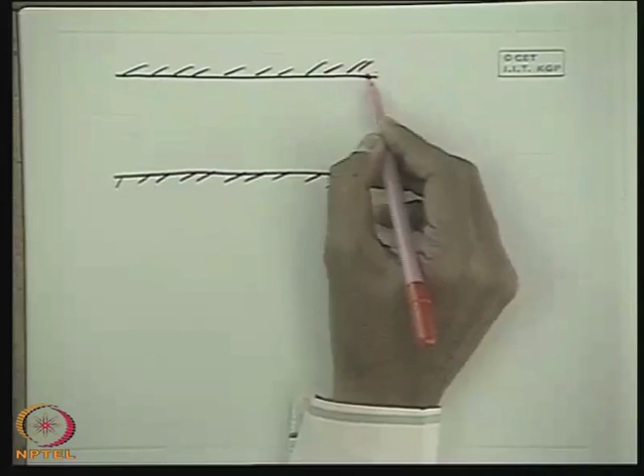So let us now see how we can do it. First we recall the friction factor concept, starting with flow through a pipe. This section is dedicated to viscous flow through a pipe, specifically turbulent flow. This is the pipe, and this is the axis of the pipe. We take a control volume.

Now let us consider a control volume whose surfaces are coinciding with the pipe surfaces. Let us take the control volume like this. Now we see what are the forces acting on it.

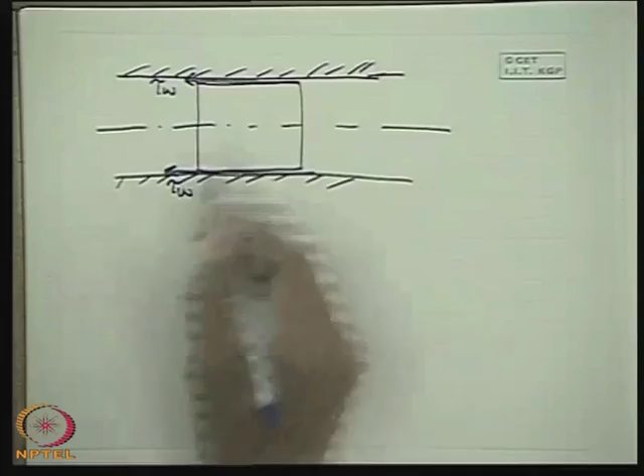One is the shear force, tau W, acting on the surface, in the same direction because this surface is coinciding with the cylinder surface of the control volume. Flow is taking place in this direction, so the shear stress tau W acts throughout the surface in this direction. Pressure is acting at this cross section, let it be P.

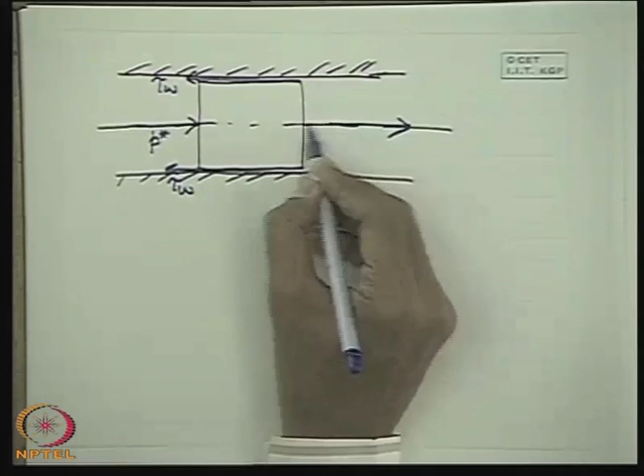Let this be the piezometric pressure. We consider the pressure as static pressure plus the equivalent pressure head due to the elevation head, that is the potential from a reference datum. Why do we take it? Because in case of a vertical pipe, or a pipe inclined in a vertical plane, the difference in pressure between one section and another is the static pressure difference plus the change in potential head, which takes care of the gravity forces. This type of analysis we have already made.

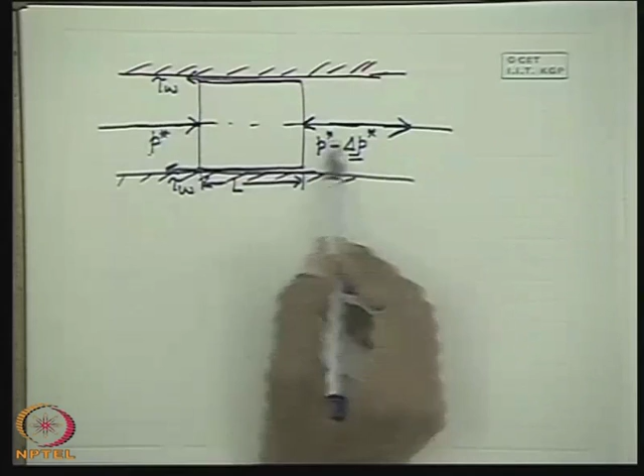So there is a loss in piezometric pressure, delta P star. Let this be the length of the control volume, or the fluid element as you may call it. So this is the loss over the length L in the piezometric pressure. This difference will be the difference in piezometric pressures, which is the difference in static pressure if the pipe is horizontal.

Now if we make a force balance considering the inertia force to be zero, as in a parallel flow through a tube or pipe, the inertia force is zero, as we discussed earlier. So if we make the force balance of this fluid element, meaning it is in equilibrium with the pressure and shear forces, we can write this.

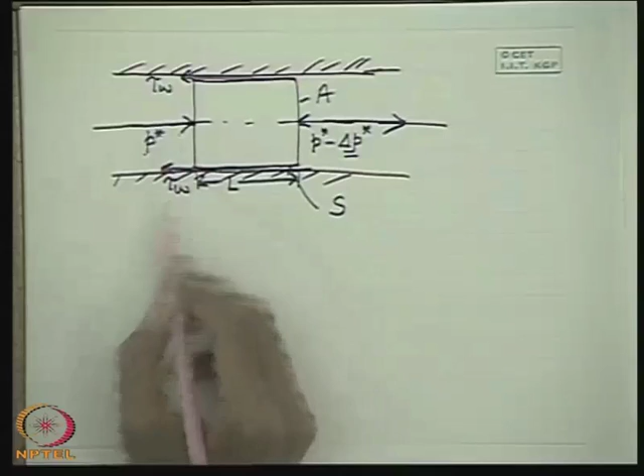If we consider the cross sectional area as A, and the wetted perimeter as S - this is valid not just for a pipe but for any duct - then we can write P star into A on this side, minus P star minus delta P star, into A. This is the net force in this direction due to pressure, which must be balanced by the opposite direction force, that is tau W into the surface area, meaning the wetted perimeter times L, where L is the length, giving the surface area.

So simply we get from here, tau W equals delta P star A by S into L. So this is the shear stress, where S into L is the surface area, wetted perimeter into length, the total surface area over which the shear stress acts. So this is all right.

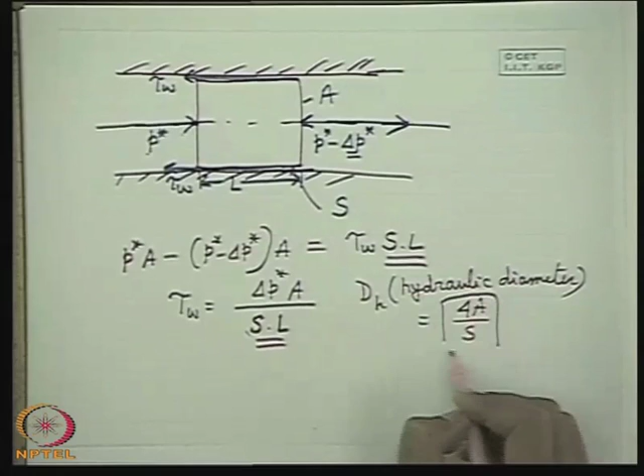Now if we define a hydraulic diameter DH - how do we define it? We define hydraulic diameter as 4 times the cross sectional area divided by wetted perimeter. This is the general definition of hydraulic diameter for flow through a duct, internal flow: 4A by S. So we can write A by S as 1 by 4 DH. So this becomes DH by L into delta P star.

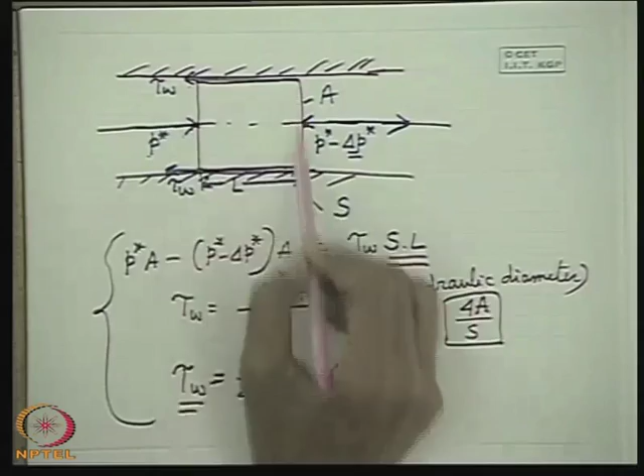So we get an expression relating shear stress to piezometric pressure drop, which accounts for the change in potential head in terms of equivalent pressure. In case of a horizontal duct, it is simply the static pressure drop. So you see shear stress is related to pressure drop, found through a straightforward application of force balance on a fluid element when inertia force is zero. Physically, it is because of shear stress that there is a pressure drop. For an ideal fluid with no shear stress, there is no pressure drop from one section to another - pressure remains the same at all sections, and the energy also remains the same.

There is no dissipation of energy. So therefore the shear stress is related to pressure drop by this expression.

Now if we go one step forward, recalling an earlier class, we discussed that the coefficient of skin friction, or skin friction coefficient CF, is defined as the shear stress at the wall divided by the dynamic head, half rho V square. We define that for any type of fluid flow, whether internal flow through a duct or external flow past bodies, the skin friction coefficient, a dimensionless parameter, is defined as the shear stress at the wall, that is at the interface adjacent to solid and fluid.

So tau W divided by half rho V square, where V is the reference velocity, which in case of internal flow or flow through ducts is the average flow velocity. If I write this definition and put this value of tau W, it becomes 1 by 4 into dH by L into delta P star by half rho V square.

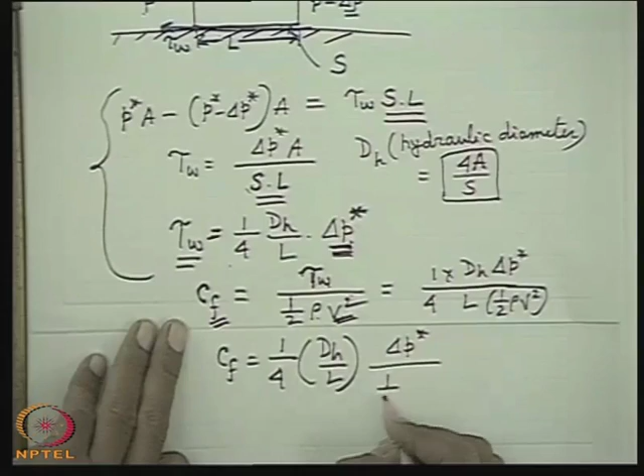This CF is known as, again I write, CF is equal to 1/4 dH by L, all dimensionless parameter, dH by L and delta P star divided by dynamic head, half rho V square. So this way I write, this CF is known as

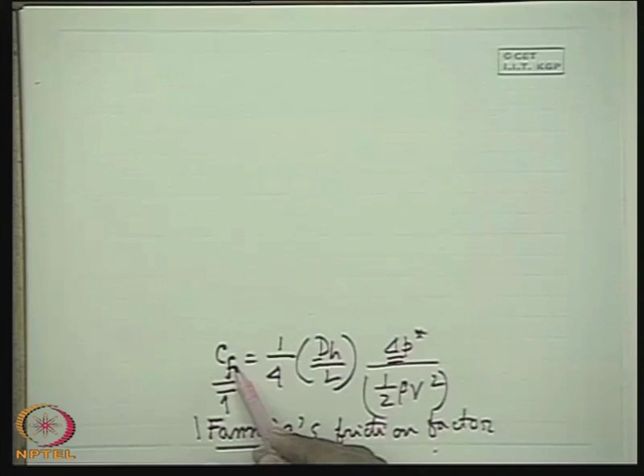Fanning friction factor. Fanning is the person, Fanning's friction factor. This CF, derived from the basic definition of skin friction coefficient in terms of piezometric pressure drop or static pressure drop, as you say, in case of internal flow, and the hydraulic diameter, is known as Fanning friction factor. That means it is derived from the basic equation of skin friction coefficient in terms of the shear stress at the wall, but then it is expressed in terms of the pressure drop.

Since we know the relationship between shear stress and pressure drop derived from the force balance of a fluid element, the final expression stands as skin friction coefficient in terms of the pressure drop and the hydraulic diameter, and this is the average flow velocity in case of an internal flow through a duct, whose definition is Q by cross-sectional area.

So if cross-sectional area remains same in the direction of flow, the average velocity remains same, because Q always remains same under steady condition. So if the cross-sectional area changes, the average velocity changes. So this is the definition of Fanning's friction coefficient.

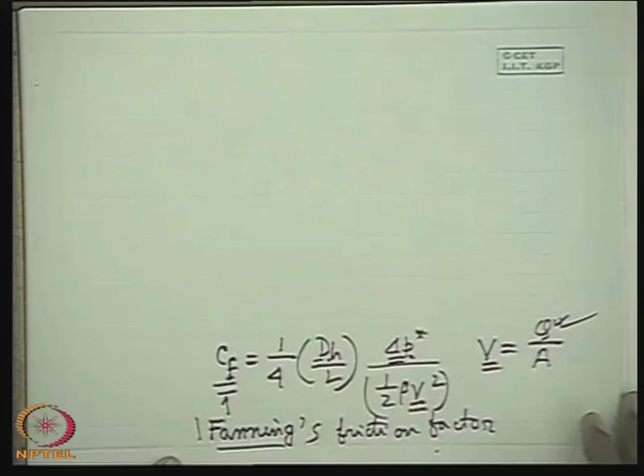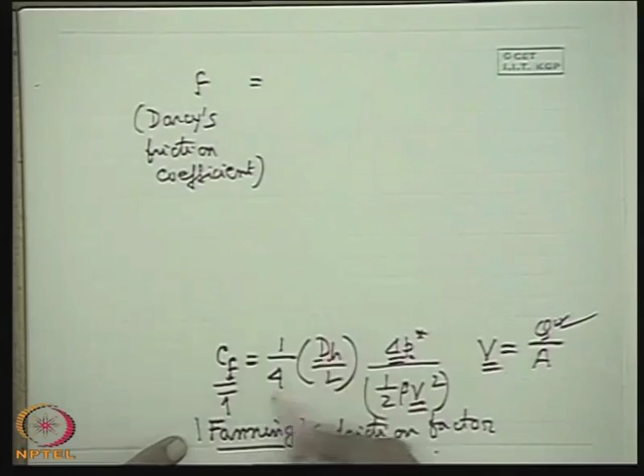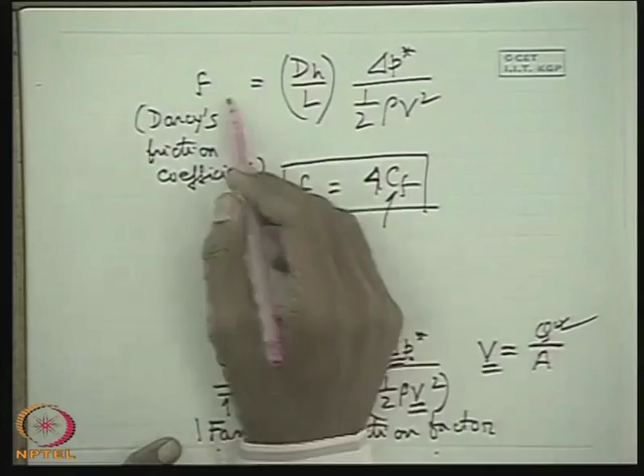So Darcy defines the friction coefficient F, that is Darcy's friction coefficient. This is Darcy's friction coefficient, another person who defined the friction coefficient F by doing away with 1 by 4 — he left out this 1 by 4 — simply defining it as dH by L times delta P star divided by half rho V square, which means F is nothing but 4 CF. That means if you multiply the Fanning friction coefficient by 4, you get the friction coefficient F. F is dH by L, delta P star, half rho V square. So this is the definition of Darcy's friction coefficient.

This equation defines Fanning's friction factor. This equation defines Darcy's friction coefficient or friction factor, whatever you call it. Now this equation is actually represented in a different form, not as F alone. If we write delta P star as F into L by dH into half rho V square, this equation becomes useful to practical engineers.

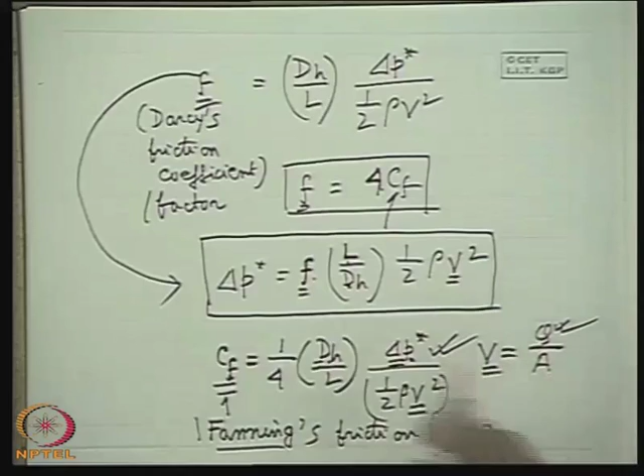What they do is, if they can know the friction factor for a particular flow from some handbook, some chart, or from predetermined experimental values, knowing the geometry of the duct, they can find out the pressure drop for a given length L. Geometry means the hydraulic diameter is known, and if the flow rate is known, one can find the average velocity knowing the cross-sectional area, and then find out the pressure drop in the duct.

And one can find out the corresponding power requirement. Power requirement is simply delta P into Q — this is the fluid flow rate, and this is the pressure drop over a given length. So to force that fluid at this rate over a given length, this much power is required. So for a given flow rate through a given geometry of pipe, that means for a given length and given diameter, one can find the pressure drop and the power required.

Or the other way, if we know the power or pressure drop, I can find out what should be the flow rate. So this equation is very important in the applications of pipe flow, or viscous flow through a pipe.

Now for a circular tube or pipe, dH is the pipe diameter d, because 4 times cross-sectional area is pi d square by 4, divided by the wetted perimeter. Since the pipe is flowing full, so pi d, so this d becomes d. So therefore this will simply be L by d.

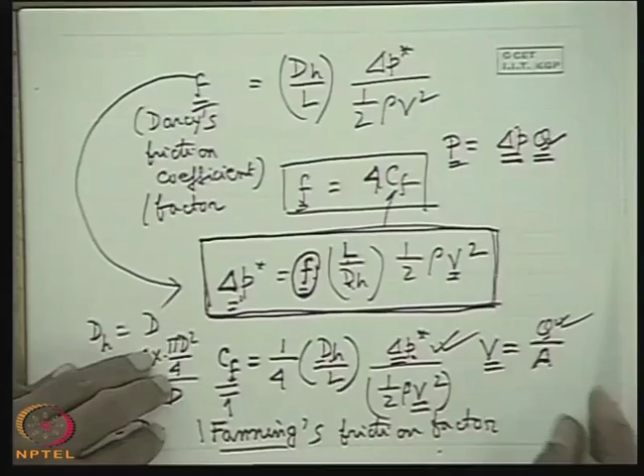So now the problem boils down to knowing the values of the friction factor. Now let us write the friction factors for pipes. I will discuss this, the Darcy's friction factor in pipes.

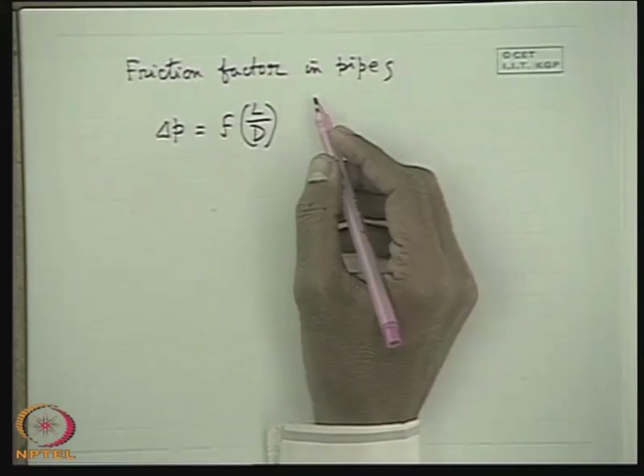Definition is like this: delta P is equal to this friction factor times L by D, length to diameter ratio, times half rho V square, dynamic pressure, where V is the average velocity, where V is equal to Q by area. So this has to always be in front of your eyes, this definition of friction factor.

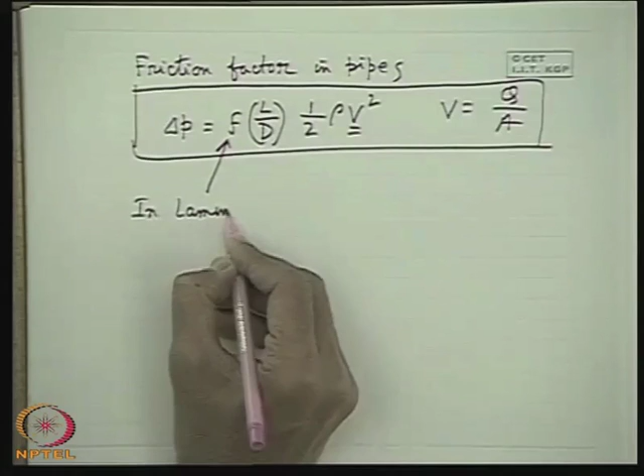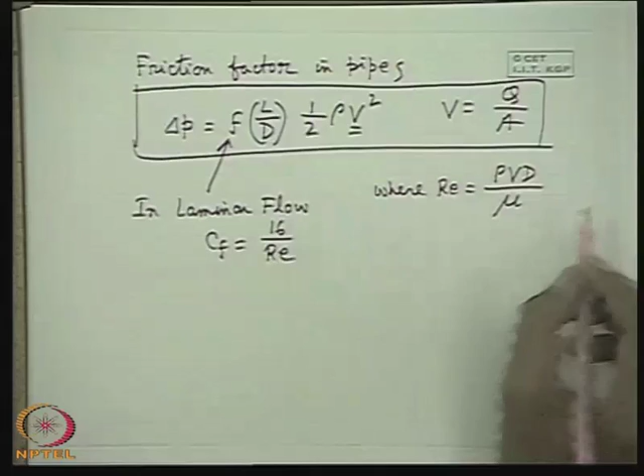Now this F, first of all in laminar flow, we have already deduced the value. From the exact solution we have found Cf is equal to 16 by Re, Reynolds number, which we have found from the Hagen-Poiseuille solution in class, rho Vd by mu, where V is the average flow velocity in the direction of flow, that is the axial direction of the pipe. This combination of parameters is dimensionless, this typical combination rho Vd by mu,

which is known as Reynolds number. We have seen that tau W by skin friction coefficient by half rho V square, which is nothing but Cf, the fanning friction factor here, equals 16 by Re. So F is equal to 64 by Re. So it is a simple analytical relation we know.

But in turbulent flow it is difficult to develop that relationship from theory, but nowadays we are doing it with the aid of computational fluid dynamics, and also experiments are being done to match it. Even the solutions of turbulent flow, as I have told earlier, depend upon experimental information. So they are generated basically from experiments.

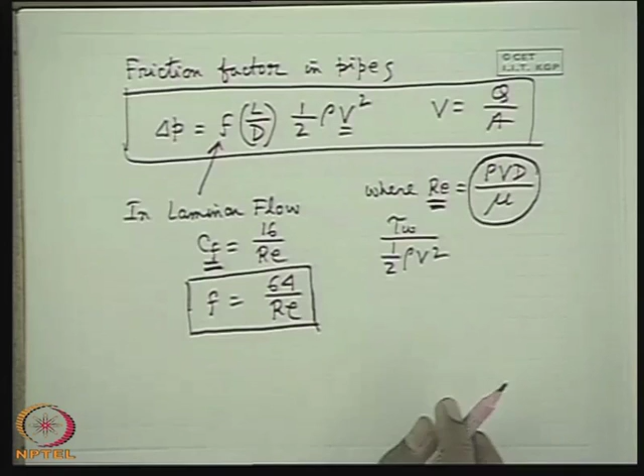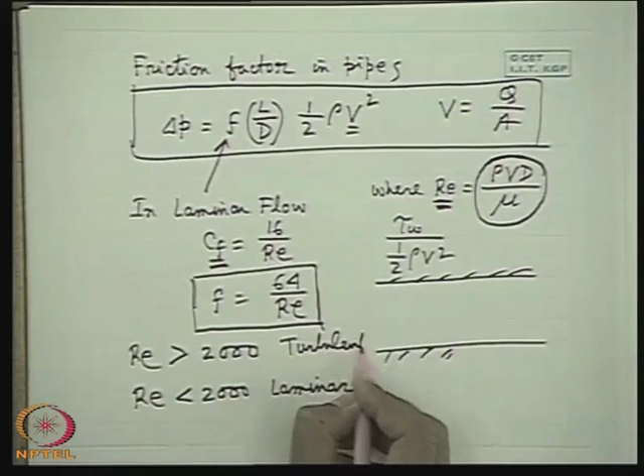Now first of all you have to know, in a pipe flow, the flow becomes turbulent when this Reynolds number as defined exceeds the value of 2000. That means Reynolds number less than 2000, the flow is laminar. So this Reynolds number criteria for flow to change from laminar to turbulent depends on flow type. So this is the 2000 Reynolds number below which the flow is laminar, and above which the flow becomes turbulent. This is only in case of pipe flow.

For different types of flow, the criteria for Reynolds number for flow changing from laminar to turbulent is different, meaning the values are different. But Reynolds number is the dimensionless number which serves as the criteria for laminar to turbulent flow.

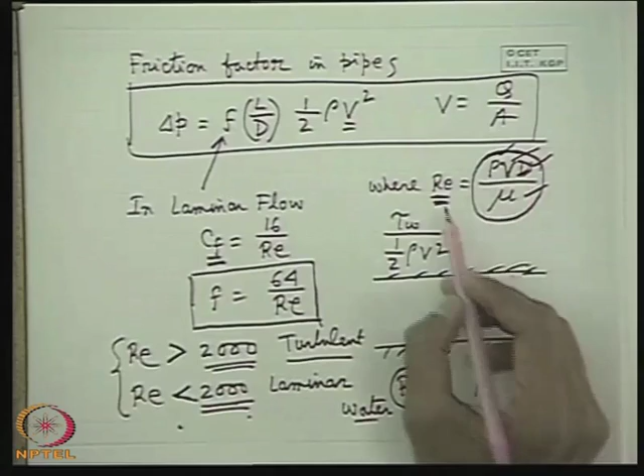So considering water, even at ambient condition, if you take its value of rho and mu, you can find out to maintain a value of 2000 or below, to keep the flow laminar, you require, even for a feasibly small diameter in laboratory or in practice, a certain value of V. That means an extremely small value of flow velocity or extremely small value of D can only make the Reynolds number less than 2000. For all practical applications, a moderately large value of D and moderately large value of V makes the Reynolds number exceed 2000, so the flow becomes turbulent.

And in turbulent flow, the geometry of the friction factor or the shear stress changes. The shear stress, that is the friction between layer to layer of the fluid, and between fluid and solid, is enhanced by the mixing in turbulent flow. I will discuss that afterwards.

So in turbulent flow, the flow resistance, which is due to friction between the fluid layers or between fluid and solid, is increased. That means the viscosity is apparently increased. That's why a term, apparent viscosity or eddy viscosity, comes in case of turbulent flow. So therefore the flow resistance is increased, and pressure drop is increased for a given flow in the turbulent region.

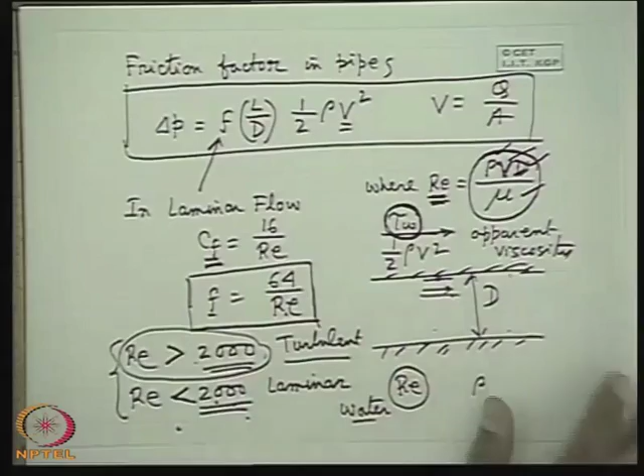There is not a single equation by which one can fit the pressure drop and flow rate relationship, or skin friction coefficient F versus Reynolds number, throughout the entire range of turbulent flow. That means when Reynolds number becomes more than 2000, a single formula will not hold good. So in different ranges, different formulas are applicable.

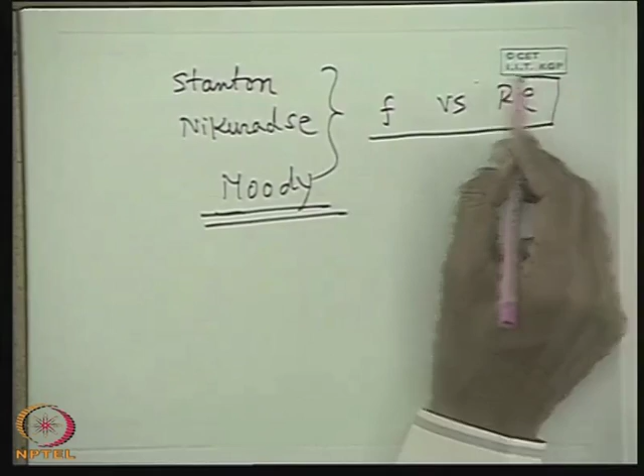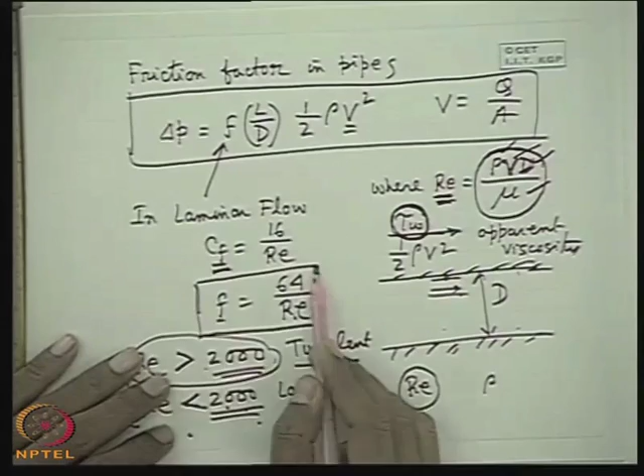This is the friction factor versus Reynolds number. Now another fact I must tell you: it has been found that in laminar flow, the friction factor from analytical solutions of Navier-Stokes equation is a function of Reynolds number only. But in turbulent flow, friction factor is a function of both Reynolds number and the roughness factor.

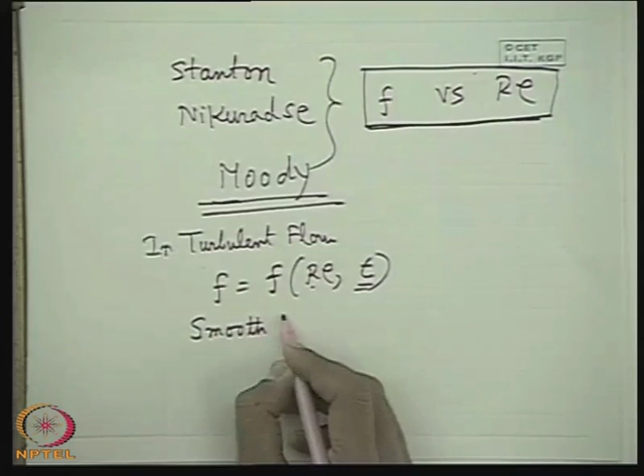So usually in laminar flow the friction factor is a function of Reynolds number, and there is another type of pipe, that is smooth pipe, whose roughness is almost zero. So there the friction factor is a function of Reynolds number. But for all commercial pipe it has got roughness. Roughness is measured in commercial pipe by the size or height of the protrusions at the surface.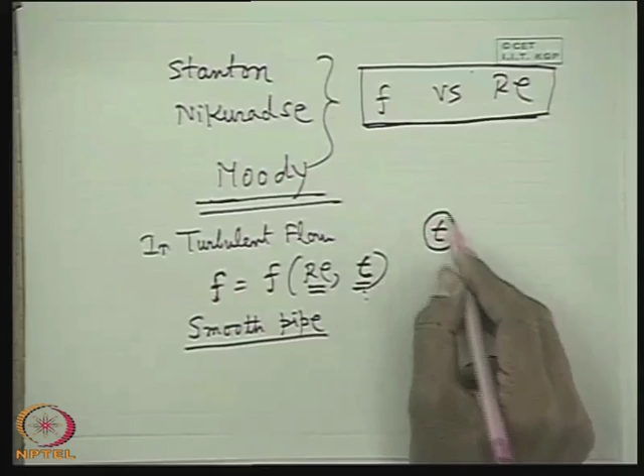There are several methods by which surface roughness is specified. So for all commercial pipes we know the surface roughness; or other way, commercial pipes are specified by surface roughness. This is a linear dimension. It is either specified by measurement of surface roughness, or by comparing the flow rate and pressure drop data of a commercial pipe with those of a pipe where artificially the roughness is created by gluing sand grain of uniform height, so that this height is the measure of the roughness.

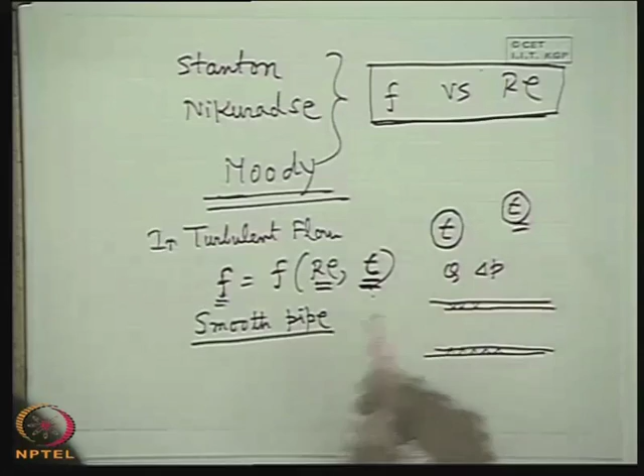Actually a statistical average of the surface protrusion is the measure of the roughness of a commercial pipe. So for commercial pipe in turbulent flow region, friction factor is a function of roughness. But for any commercial pipe, if the flow regime is laminar, it is a function of only Reynolds number. So only in case of turbulent flow does the surface roughness come as an influencing variable in friction factor.

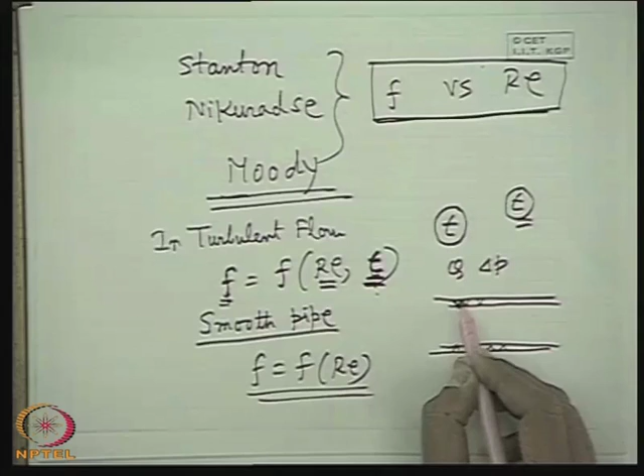The physical reason behind this is that in case of laminar flow the boundary layer is so high that the surface protrusion cannot protrude over it, because these things we have not come across so far. This does not make any contribution to the velocity gradient at the wall to change the shear stress. So this is not so in case of laminar flow, but in turbulent flow the surface roughness is an influencing parameter in changing the friction factor. It becomes a function of both Reynolds number and surface roughness.

So this has now been plotted nicely by Moody. This is known as Moody's diagram. Here the friction factor is the ordinate, and this is the Reynolds number. This is plotted on a log scale to cover a wide range, and this is the dimensionless surface roughness, that is surface roughness epsilon by the pipe diameter, epsilon by d, known as relative surface roughness.

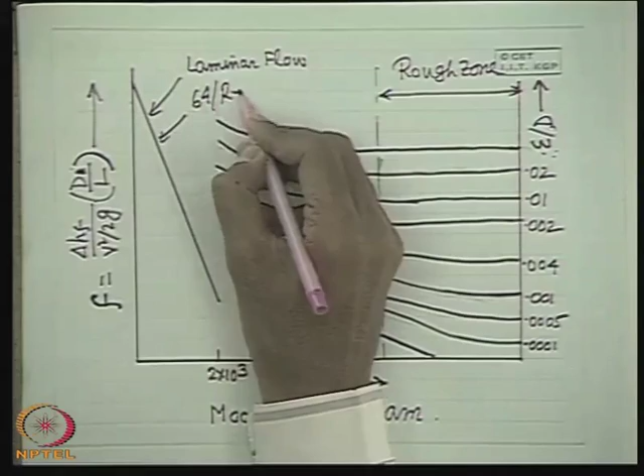So now in laminar flow this is the equation, F is equal to 64 by Re, because we have developed this from analytical solutions of the Navier-Stokes equation, that is the Hagen-Poiseuille equation, where Cf is 16 by Re, so F is 64 by Re. So this is for laminar flow.

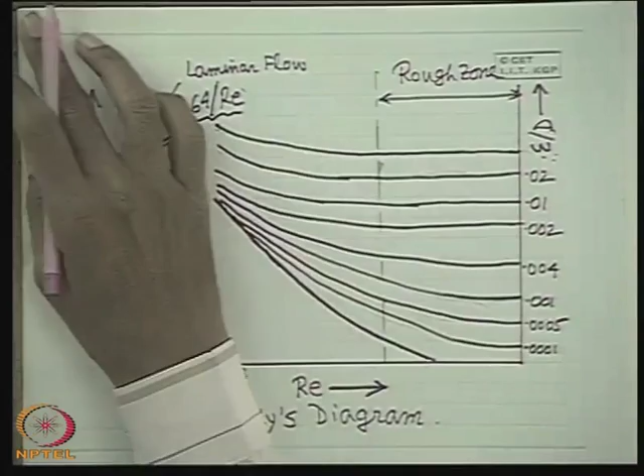There is a discontinuity from laminar to turbulent flow, because just after laminar flow, turbulent flow doesn't occur immediately. There is a transition zone through which turbulent flow is set up, and within this transition zone everything is unpredictable. The flow oscillates from laminar to turbulent, turbulent to laminar, so everything is very uncertain. So there is a discontinuity in the curve.

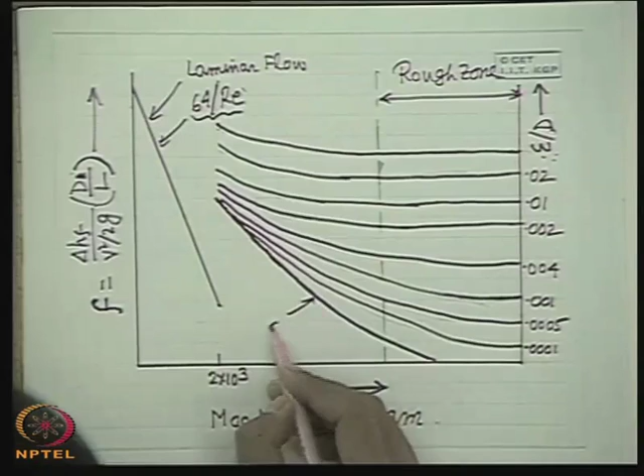We will see now, this curve is for smooth pipe. So after that you see the curves are branching off from the smooth pipe curve with the increasing order of the roughness, that is, increasing order of epsilon by d.

Now one characteristic feature is that in turbulent flow for rough pipes, after some Reynolds number the curve becomes more or less parallel, which means the friction factor becomes independent of the flow rate and inversely becomes independent of the Reynolds number.

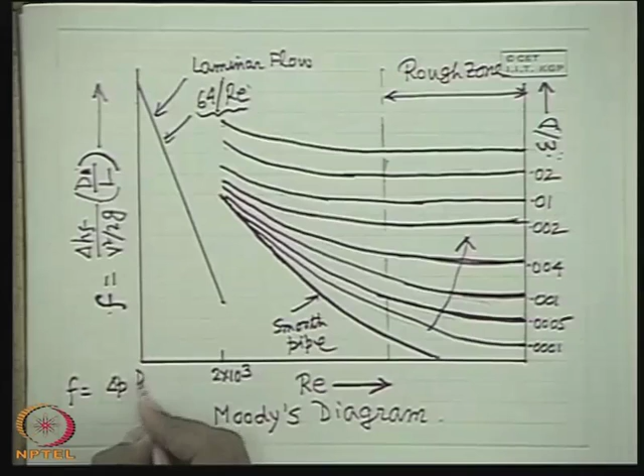Now if you define the friction factor, you should not be confused. Friction factor decreasing with Reynolds number does not mean the pressure drop decreases with the flow rate, because friction factor is defined as: F is delta P d by L, divided by half rho V square.

So you see, when friction factor is a linear inverse function of Reynolds number, this means delta P is a linear function of V. As you know from the Hagen-Poiseuille solution, delta P is a linear function of V, so F becomes an inverse function of V, and friction factor decreases inversely with V.

Here friction factor becomes independent of Reynolds number, which means friction factor becomes independent of velocity, because Reynolds number is rho v d by mu. So for a particular pipe, change in Reynolds number means change in v. That means pressure drop is proportional to v square.

That means when these curves are parallel, the friction factor is not dependent on Reynolds number, which means pressure drop is almost a function of v square. So v square cancels, and friction factor becomes a constant value.

But before that, friction factor is an inverse function of Reynolds number. That means delta p is a function of v to the power 1 to 2, not equal to 2, so that this friction factor becomes an inverse function.

So delta p always increases with the increase of v, but the power represents whether friction factor will be constant or will be decreasing. If the power is more than 2, it doesn't happen in fluid flow practice, then friction factor would increase with the increase in Reynolds number.

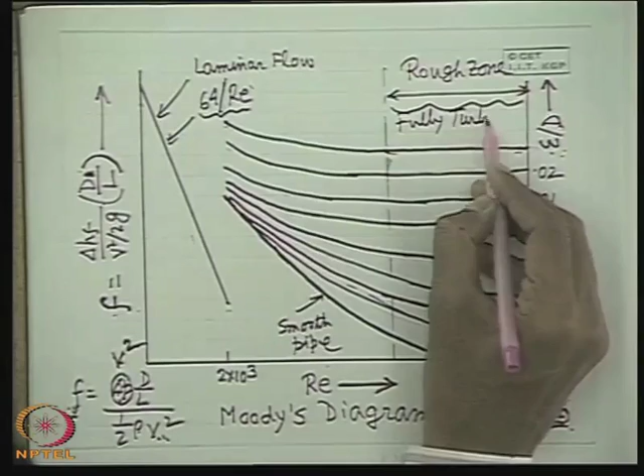This doesn't happen. This zone is known as the rough zone, meaning the pipe is in the completely rough zone or fully turbulent zone, where the friction factor is independent of Reynolds number and pressure drop is proportional to v square.

And this portion, where the curve of different commercial pipes of different roughness branches off from the smooth pipe curve, is known as the critical zone. These are not very important.

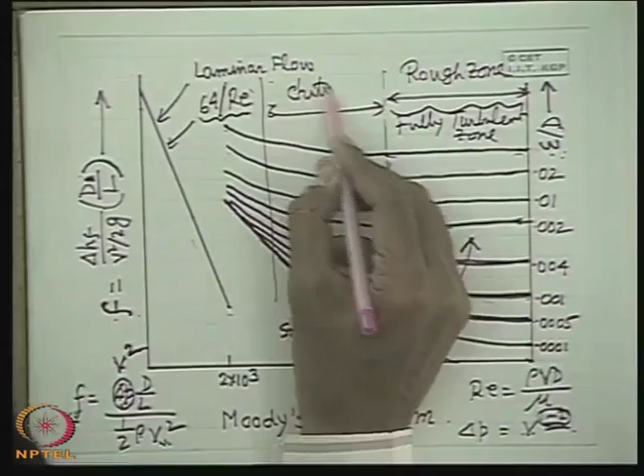Now what is important from the point of view of solving industrial problems is that one should read the value of friction factor from this Moody's diagram. That means if I know the roughness factor for a commercial pipe and the Reynolds number, I can find out the friction factor. The laminar curve is hardly used because practical problems are associated with turbulent flow, not laminar flow. So this is Moody's diagram.

Okay, now come to the practical situations. With this background and knowledge, I go one step forward to discuss what are the different types of problems that a hydraulic engineer faces. There are typically 3 types of problems.

One is that the flow rate and pipe diameter are given, find pressure loss over a given length and the corresponding power. This is the first type of problem, very simple, a straightforward school level problem. That means flow rate and pipe diameter are given, so velocity is known. Find the pressure loss over a given length using a straightforward application of this equation.

When the velocity is given, I can find out the Reynolds number, rho v d by mu, because v and d are given. For water as the working fluid, the rheological properties will be given, and I know Re. So F as a function of Re, if it's a smooth pipe, otherwise a function of epsilon, I know the value of F. Straightforwardly I can find out delta P and the corresponding power, Q into delta P. This is the straightforward application.

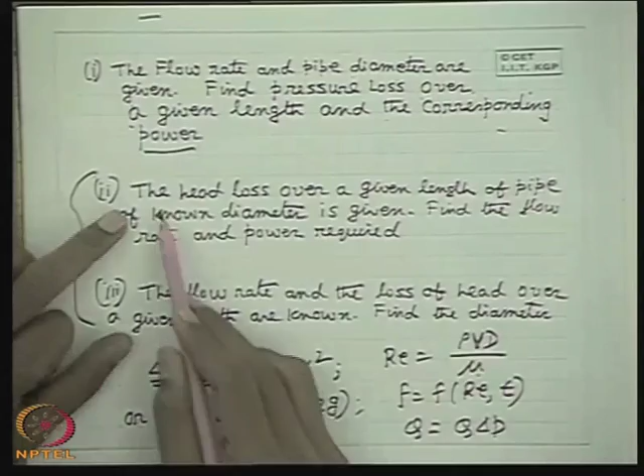But the second and third kind of problem are relatively difficult. Why? Because in the second kind of problem, the head loss over a given length of pipe of known diameter is given.

Head loss means this: either you express it in terms of delta P or in terms of head loss, that means delta P by rho g. So sometimes we express this equation in terms of the pressure drop as it was derived first, or in terms of the head loss.

Head loss means loss of pressure energy, that is, in terms of the pressure head, delta P by rho g, that is v square by 2g. Then this part becomes the velocity head. The dynamic head, rho v square, per unit mass, is the velocity head.

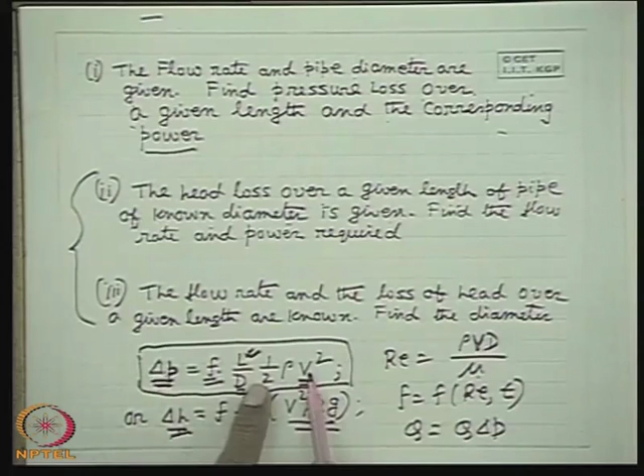So head loss over a given length is given, that means length is given, head loss is given, that means delta P is given. Find the flow rate and power required — for that you have to find out V.

Why is it difficult? Because when V is unknown, we do not know even F, since to calculate F from Moody's diagram we require the Reynolds number. Even if we know epsilon, the main variable is Reynolds number. Velocity is not known beforehand, so Reynolds number is not known. So there are two unknowns — we don't know F, we don't know V — because F is a function of V through the Reynolds number.

So this type of problem cannot be solved straightforward, but is solved by an iterative procedure. Here, we first guess a friction factor and find the first iteration velocity from known values of delta H or delta P, using the equation. Then this iterative value of V is used to find the Reynolds number and find F from Moody's diagram. Then we use this F in the equation to find the second iterative value of V, and again find at that V what is the second Reynolds number and friction factor, and check the convergence between these two. This way it is iterated.

I will show you an example. The third problem is also of a similar type.

The flow rate and the loss of head over a given length are known, find the diameter. That means flow rate is known, V is known, but diameter is unknown. In this equation diameter is unknown, and diameter unknown means friction factor is unknown, because to know friction factor I have to know both the average flow velocity and the diameter. So if diameter is not known, it becomes an iterative problem, and it has to be solved by iteration.

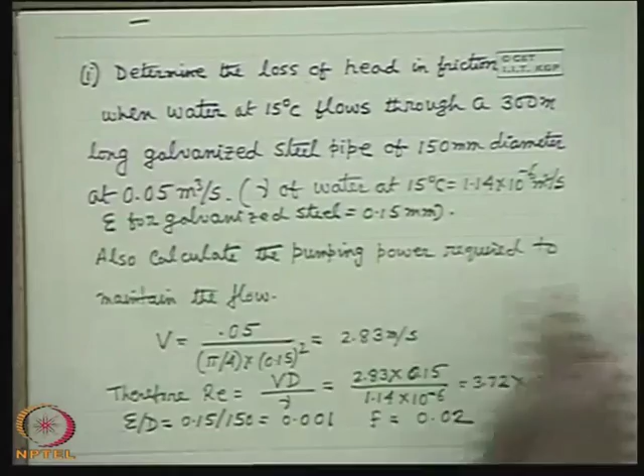Class 1 category of problem, which can be solved directly. Determine the loss of head in friction when water at 15 degrees Celsius flows through a 300 meter long galvanized steel pipe of 150 millimeter diameter at 0.05 meter cubed per second.

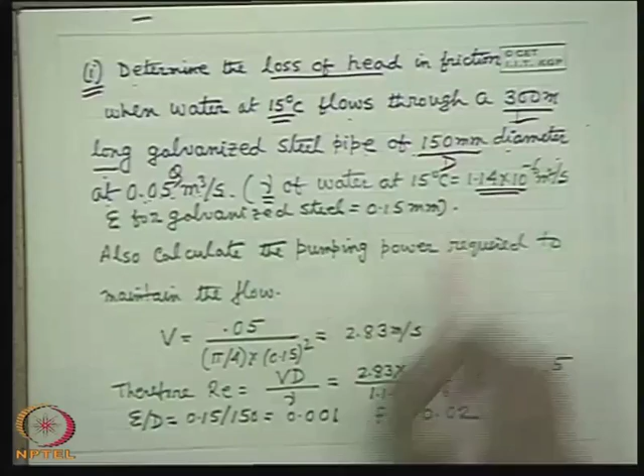Here the loss of head is to be found, that means delta H has to be determined. What is given? The length is given, the diameter D is given, and the flow rate Q is given, that means the average velocity can be found. The kinematic viscosity nu of water at 15 degrees Celsius is given, so rho and mu coupled together give us nu. Epsilon for galvanized steel is given, that means the roughness factor is given. So this problem is a straightforward application.

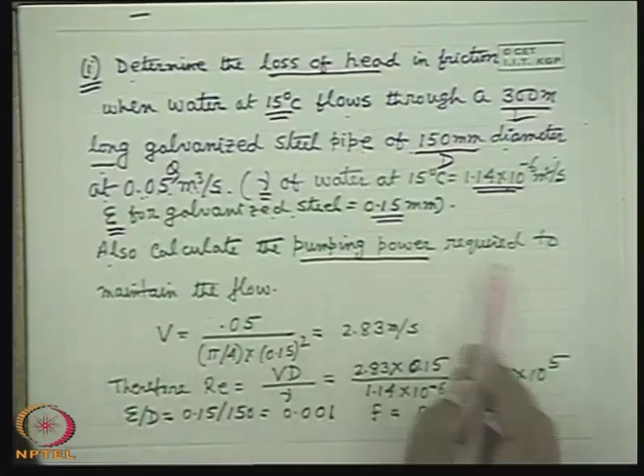Now we have to find the loss of head and also the pumping power required to maintain the flow. Let us first find the average flow velocity: it is Q by pi by 4 D square, the cross sectional area, with D equal to 150 millimeter, 0.15 meter square. This gives V equal to 2.83 meter per second.

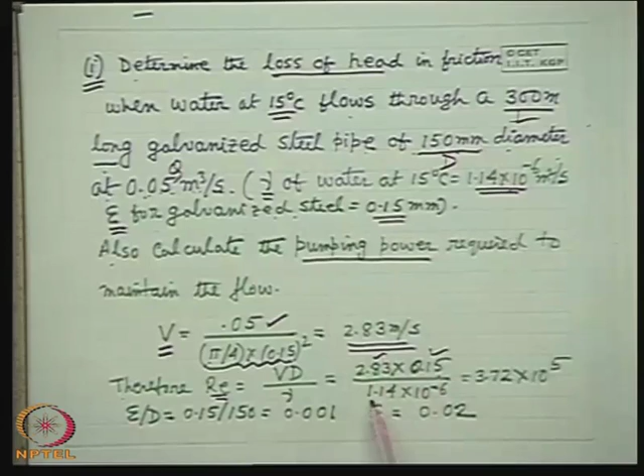So therefore we immediately calculate the Reynolds number, since the diameter of the pipe, 150 millimeter or 0.15 meter, is known: Vd by nu, that is rho Vd by mu, which equals Vd by nu. So I get the Reynolds number. Now from Moody's diagram, with the relative roughness — here roughness is given in millimeter...

So to read Moody's diagram, I have to find out the relative roughness, which is 0.001. I find out F as 0.02, straightforward. This cannot be found from the figures I have shown because I have not drawn the numerical thing.

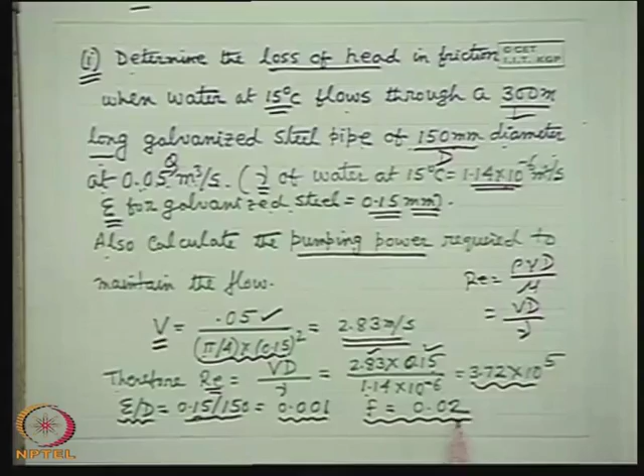Straight away you see Moody's diagram, it is given in each and every book. You straight find out the value of F. So knowing this value of F, one can find out what is the loss and what is the power required. So F is 0.02. How can I find out HF? So delta H is equal to what? F L by D, V square by 2G.

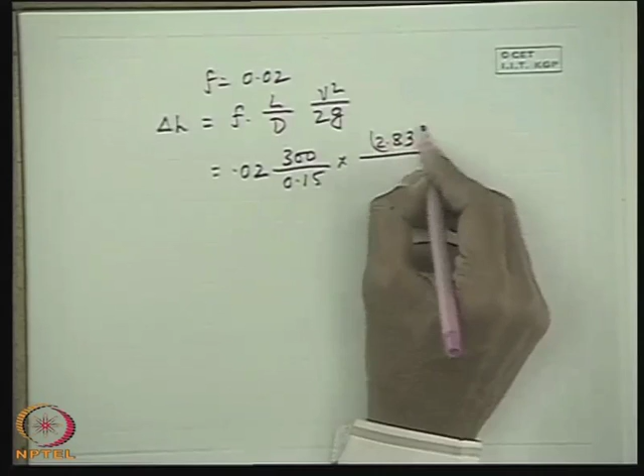So 0.02. What is L? L is 300 meter, and D is 0.15 meter. L by D into V square, V is 2.83 whole square, 2 into 9.81. So you straightforward get delta H.

This delta H is 16.33 meter. Now power requirement is delta P into Q. Delta P is rho G times this, that means 10 to the power 3 into 9.81 into delta H. Delta H means delta P by rho G in terms of the head. So head loss means the pressure loss, delta P by rho G. So again rho G I multiply with delta H, so delta P into Q.

What is the value of Q? So far I recollect 0.05. So this gives, in terms of kilowatt, 8 kilowatt. So this is the first category of problem.

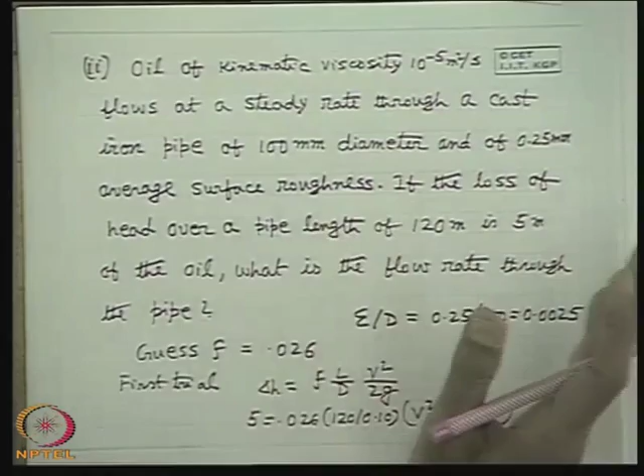Now second category of problem: the head loss is not to be calculated. Head loss is given, either flow rate or diameter, so that the friction factor is not known beforehand. For example, we see this problem.

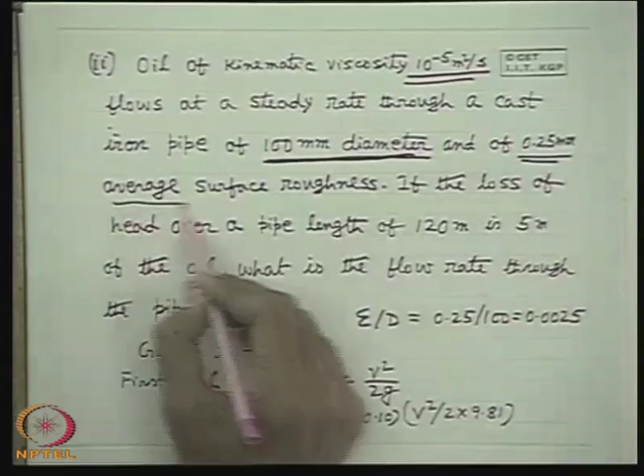Oil of kinematic viscosity 10 to the power minus 5 meter square per second - this is the kinematic viscosity, this property is given. It flows at a steady rate through a cast iron pipe of 100 millimeter diameter. I am happy, the diameter is given. And of 0.25 millimeter average surface roughness - surface roughness is given.

If the loss of head over a pipe length of 120 meter is 5 meter, that means loss of head is 5 meter and pipe length is given. L given, delta H given, this is the viscosity nu given, this is the D given, of 0.1 meter, that means this is the epsilon given. So what is not given? What is the flow rate? So I cannot find out directly.

Why? Because here, if I write delta H is equal to F L by D, V square by 2G, then delta H is given. To find out the flow rate, I have to find out the average velocity, because diameter is given. But how can I find out the average velocity? Because friction factor is not known. To know the friction factor, I require Reynolds number. Again, to know Reynolds number, I require the flow velocity.

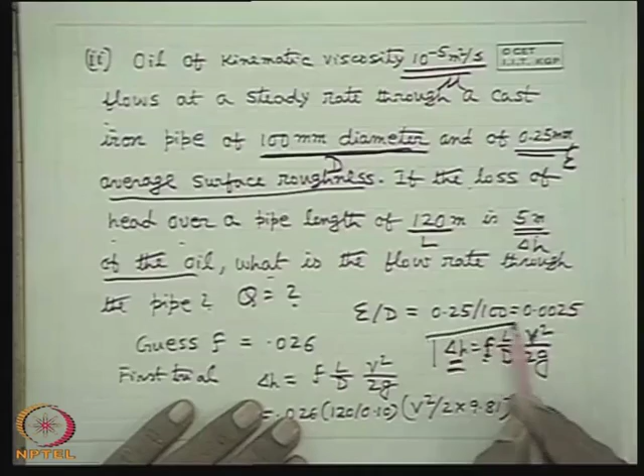So when flow velocity is not given, I have told that if flow velocity and diameter is not known, then friction factor is not known beforehand. So we cannot straightforward use this and get the solution, which is known as the explicit method - that means once you use the equation straightforward and get the solution. That is the first category of problem. But here you cannot do it. So what do we do? An iterative solution. How is it?

First you calculate the surface roughness, 0.0025 average - this is the relative surface roughness. Now then what happens? You guess a value, say 0.026. Now you can ask me, sir, how can I make a guess? You can make any guess, but in the order of 0.02, 0.01 - this is the order of the friction factor. But depending upon your guess, the number of iterative steps will depend. If you can make a correct guess, the number of iterations will be less.

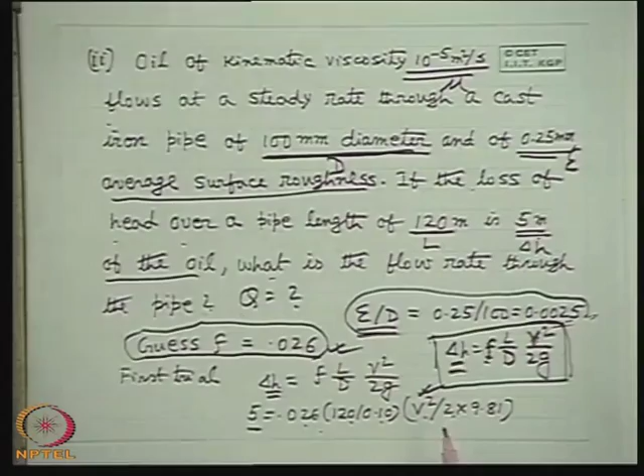Usually what you do is, with this epsilon by D value, at a moderate Reynolds number, you search a value of F from Moody's diagram - just an arbitrary moderate Reynolds number in the turbulent flow, for example 10,000. With this relative roughness, I guess a value which is 0.026. Now with this guess value, first trial I can straightforward use the delta H value and find F is equal to this, with this guess value, this V square. That means I can find out the value of V, and this first iteration will give V equal to 1.773 meter per second.

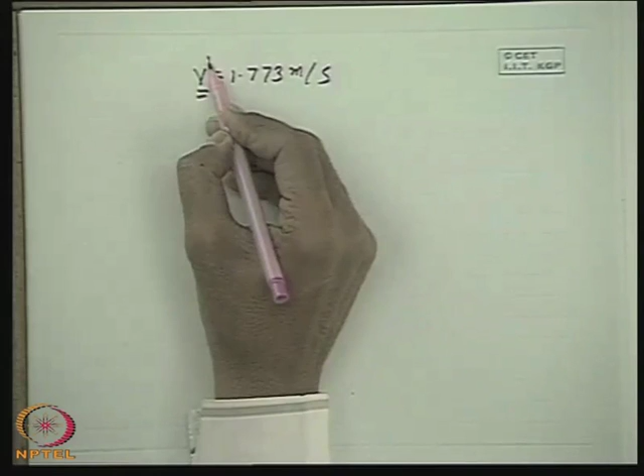With this V, I again try to find out the value of F, because F was taken as a guess value. Then I want to improve the value of F. How? With this first iteration guess, you write the number of iterations here. First iteration, I find the value of Reynolds number, that means rho V first iterative value D by mu, so that is Vd by nu, and nu is given. This becomes equal to 1.773 times 10 to the power 4. So you get the value of the Reynolds number.

With this Reynolds number and the average surface roughness, or epsilon by D, the relative surface roughness 0.0025, you get a value of F as 0.0316. With this F, you then find out the updated values of V, the next step values of V.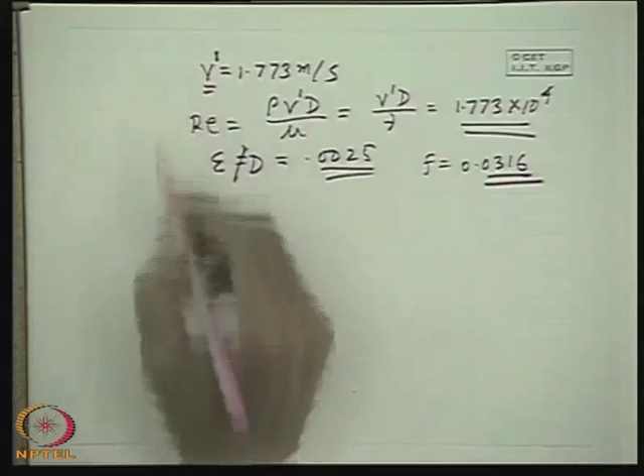That means again you use this F, F into L by D. What is L? Delta H is equal to 0.0316 into L by D, 120 by 0.10, into V square, the second iterative value, V2 square, divided by 2 into 9.81, which gives the second iterative value V2. So V2, the second iterative value, is 1.608.

With this V2, I find the Reynolds number as 1.608 times 10 to the power 4. You calculate rho Vd by mu. Then with this Reynolds number, I see that my friction factor becomes 0.0318.

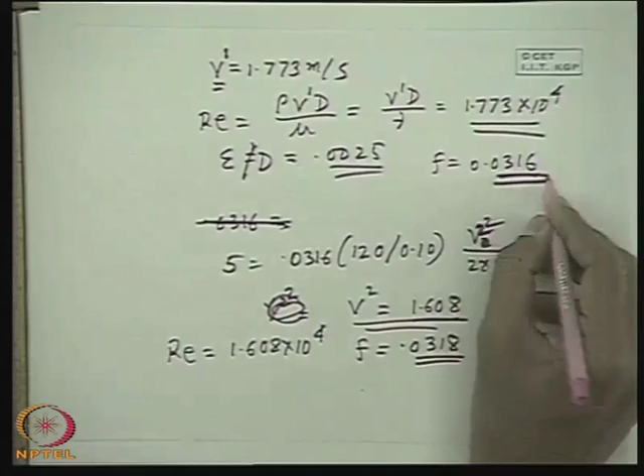Now you see the difference between these two is very small, it is 0.63%. Where will you stop? In practice, you stop where you see that your results are fairly accurate. You will have to take a judgment. If it is below 1%, the change in friction factor, we will definitely say the convergence is achieved. That means we declare the final value of 1.608 meter per second.

So you want to know the flow rate? Okay, I can tell you. 1.608 into pi d square by 4. What is d square? What is d? 0.1, 0.1 square divided by 4. So this will be 0.013 meter cube per second.

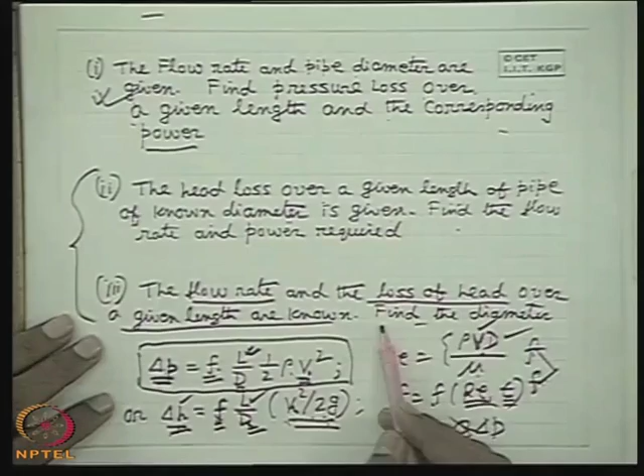So you see, therefore, this category of problems where the diameter is not given, or where the flow rate is not given, we solve by making iterations. That means to find out the diameter or the flow rate, we first guess a friction factor, then find out either the velocity, average velocity, or the flow rate, or the diameter, in the first iteration. If one is to be found out, the other is to be given.

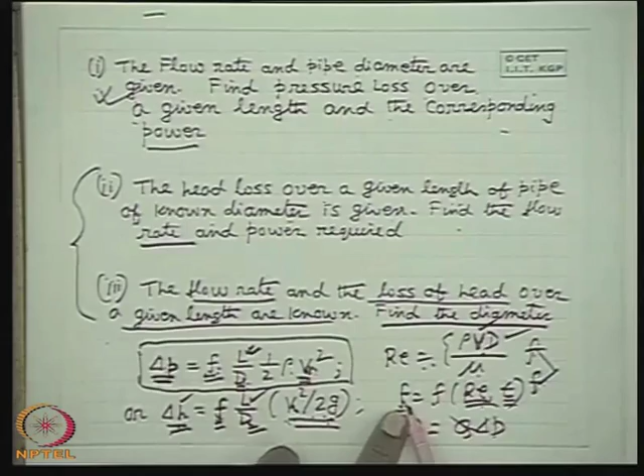We update the Reynolds number, and update the value of friction factor, and then we compare it with the guess value. If we get exactly the guess value given, that means your guess is perfectly correct and that is the answer. But if it is not so, then with that updated value of friction factor, you again calculate the diameter or velocity, whichever you have to calculate. Then again you update the friction factor, and this way you see the convergence in the iterative procedure.

But the first category, where you have to find out the head loss or the pressure drop, there you don't have to do that, because there you have L, D, V, all in your hand beforehand to calculate. You straightforward use this equation once for all and get the value of delta P or delta H, and finally the pressure drop. So these three classes of problems are straightforward, faced in practice by an engineer, and they are solved like that.

That means with the knowledge of friction factor, which is given or documented in a figure like Moody's diagram, or sometimes from a chart, full of experimental or empirical information, you use your theoretical equations developed from the force balance of a fluid element. That means the pressure drop connecting the length and diameter of the pipe and the average velocity, that is flow rate by area, through this friction factor, and you find out the parameters that you are going to determine.